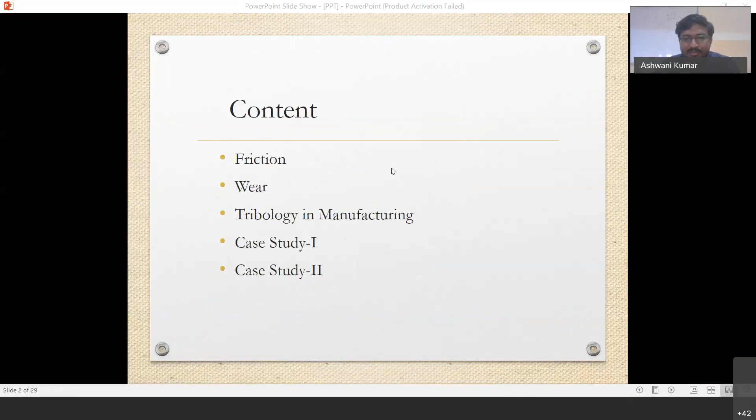In this session we will start with what is friction, what is wear, and then the application of tribology in manufacturing. We will start with friction, wear, and tribology in manufacturing, and there are two case studies that we will discuss.

So basically, what is friction? All of you know what friction is. Friction is just a resistance to movement of one body over another body. This is the basic concept. I will go through in detail the concept of friction. So friction is just a resistance of movement of one body over the other body.

But friction may be between a solid and gas, that is aerodynamic friction, or between a liquid and a solid, that is liquid friction, and there is internal friction also, due to internal energy dissipation. There is no single particular reason we can point to for the existence of friction - there are a number of mechanisms and reasons that friction can happen.

So friction is used to describe a gradual loss of energy in many situations. For example, internal friction dampens the vibration of a solid, viscous friction slows the internal motion of liquid, and there is skin friction, between a moving airplane and the surrounding air. In this lecture we'll deal with solid friction, that is between two solid bodies - the relative motion between two solid bodies.

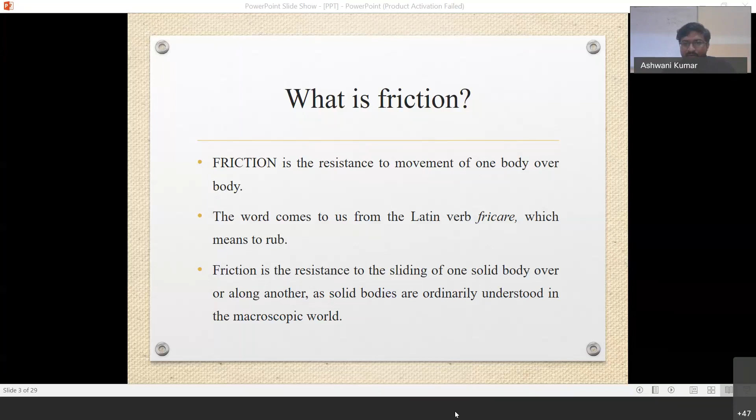The first earlier invention of man is the finding of cooking fire around 5 lakh BC, using the application of friction. The second earlier invention is around 3500 BC, the finding of the wheel, where we see that rolling friction is less compared to sliding friction. And then around 1880 BC we found evidence of the use of lubricant, that lubricant can be used for the purpose of reducing friction. So this is the history - we have very early histories regarding friction.

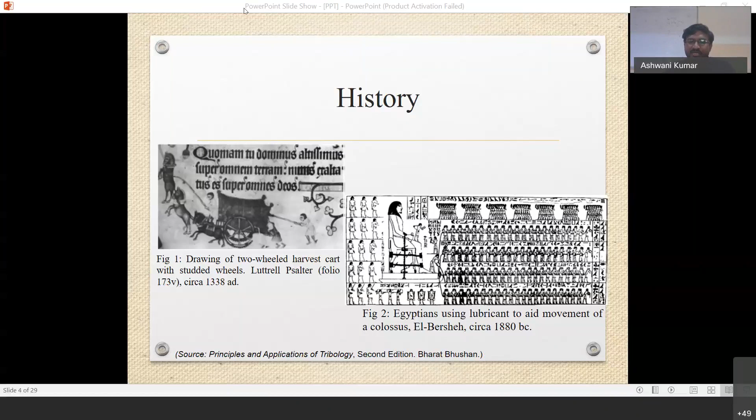In 1880 BC, there's an attempt to reduce friction, shown in a temple painting where they used animal fat for the reduction of friction. Then in 1495, there's history about Leonardo da Vinci, who formulated two basic formulas for friction: friction is independent of contact area, and friction is proportional to the load. So these are the histories.

After 200 years later, Guillaume Amontons rediscovered this concept and reasoned that friction was primarily a result of the work done to lift one surface over the roughness of the other surface. So the concept is the same throughout, but with evolution, we are increasing the points or understanding different causes of friction.

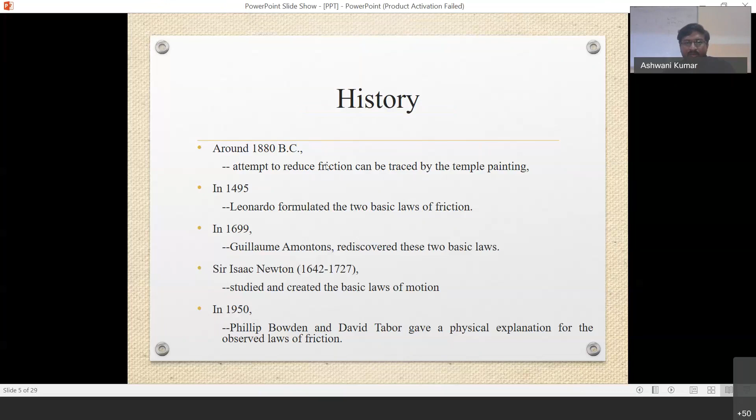Now we can discuss the general causes of friction. In general, a smooth surface produces less friction than a rough surface. What is the cause of that? The cause is how hard the surfaces are pushed together, or the type of surface involved.

This means friction is caused by the forces between the two contacting bodies acting on their surfaces. The forces are determined by, besides the load, the properties of the contacting materials and the area of contact. These are the points we have to consider: contacting material and area of contact.

Friction forces are usually not directly predictable. For example, because of changes in the environment, the surface of the bulk material changes due to environmental reactions, forming an oxide layer. So we can't say we can predict friction perfectly. The real contact is entirely different from the bulk properties of the material, so the causes of friction are non-predictable.

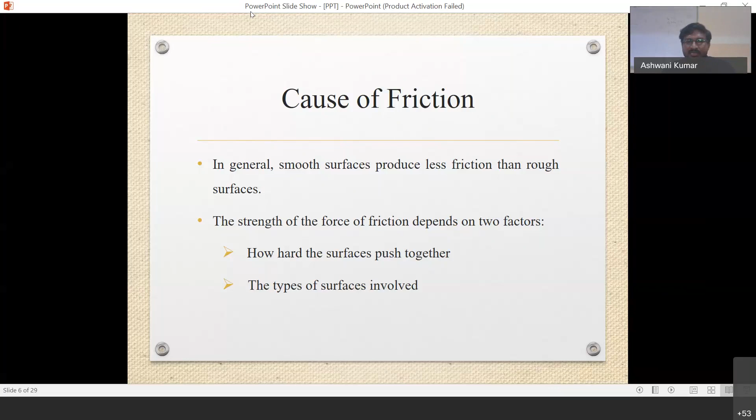There are different laws given for dry friction by different researchers, and this is a summary of those laws. The first law tells that in many situations where the resultant tangential force is smaller than some force parameter specific to the situation, the friction force will be equal and opposite to the resultant applied force, and no tangential motion will occur.

These are the six laws proposed by different researchers, concluded by Moore and Rabinowicz. The second law: when tangential motion occurs, friction always acts opposite to the direction of relative velocity of the surfaces. The third law: friction force is proportional to the normal load. The fourth law: coefficient of friction is independent of apparent contact area. The fifth law: the static coefficient is greater than the kinetic coefficient.

The coefficient of friction is independent of sliding speed. This is the sixth law.

But none of these six laws can be said to be applicable in every case. None of these laws is entirely accurate. For the purpose of dry or solid friction, laws 3, 4, 5, and 6 are only applicable under certain conditions; under different conditions they are entirely not applicable.

For example, the third law is valid only when the normal load is assumed to be very low compared to what is causing the contact area.

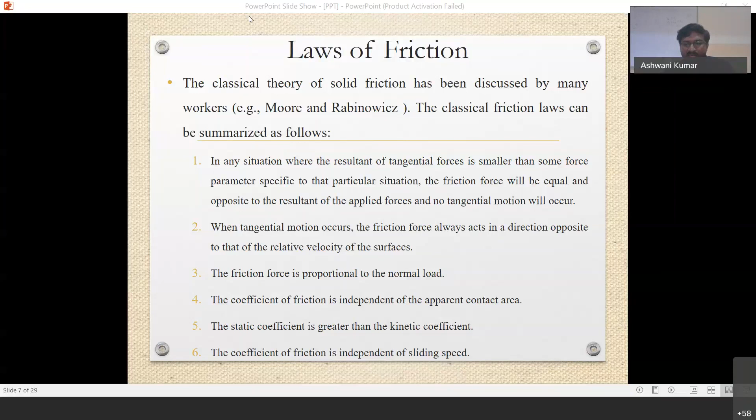When the normal load is very low, the third law is very applicable. In case of the fourth law, the materials in the contact area are assumed to have definite yield points, such as metals. In that case, it does not apply to elastic or viscoelastic materials. So these are the different conditions we have to understand, where we can apply this law and where we can't, because we are not able to apply the entire law at a point.

There is a quote by Tabor, quoting W. Pauli, that God made solids and the surfaces are made by the devil. Why so? Because the surfaces are extremely complicated due to their topography and chemical reactivity. We can say that their composition and microstructure may be very different from those of the bulk solid, and may be very difficult to determine or predict accurately. This is the challenge when dealing with friction.

You are able to see the geometric shape of a surface, where there are a number of micro events. Because of these micro events, there are different types of roughnesses. We need to understand what is the macro deviation from the ideal surface, what is the roughness, and what is the micro roughness. So this is very complicated.

Even after surface polishing, we have roughnesses, micro roughnesses, or macro deviations also. This is a part of the research we have to deal with. The difficulty is not the polishing itself, but how we are going to measure this one. As part of research, we can find methods to measure these roughnesses.

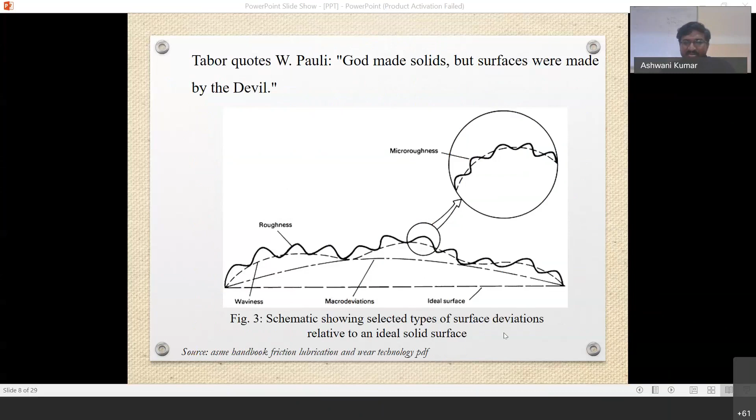So basically my point is to make you understand what is the basics of friction, what is the basic mechanism, what we are dealing with the surfaces, what we are dealing with micro roughness, and what are the different laws. This is the aim to make you understand the basics of friction. I am not going into finding the equations and mathematical expressions regarding friction. There are deep mathematical expressions for that, like different types of sliding friction, and we can go for rolling friction also. So this is just an explanation about the basics of friction, and what research related you can find or do in this area.

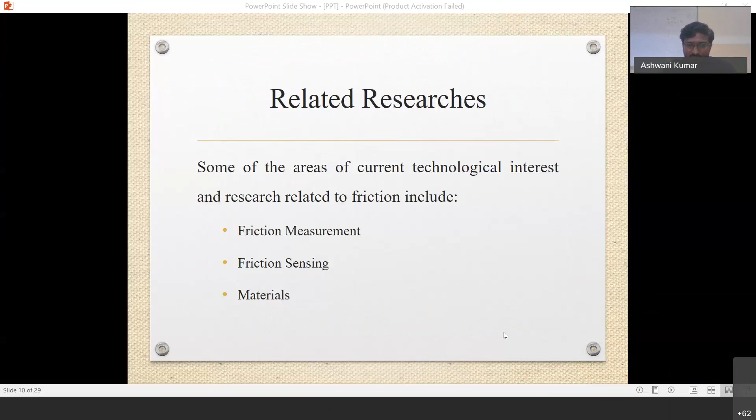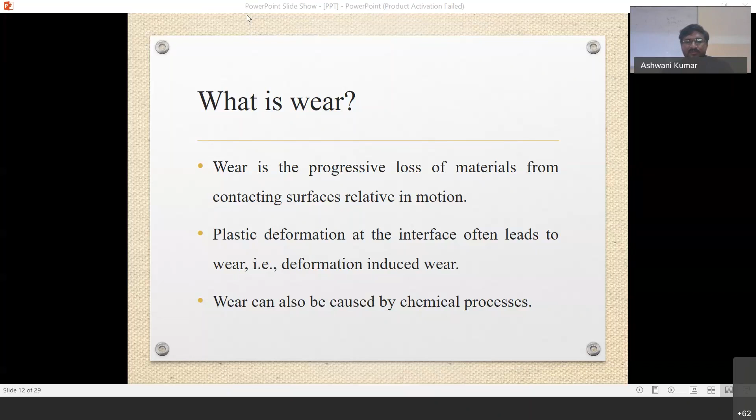This is just the basic classification under which we can define wear. Basically, there are various forms of wear in industry, or in our day to day life, such as lubricated wear or unlubricated wear. There are two conditions, and there are other things like severe wear we can classify, or we can also classify mild wear and sliding wear. These are the different types of classification we can consider for wear. Because of this classification, we can't say that in lubricated or unlubricated wear, only one mechanism like adhesion or abrasion is responsible. No, we can't say that. So there are a number of individual mechanisms, or combinations of wear mechanisms like abrasion, adhesion, fatigue, and oxidation wear, responsible for wear.

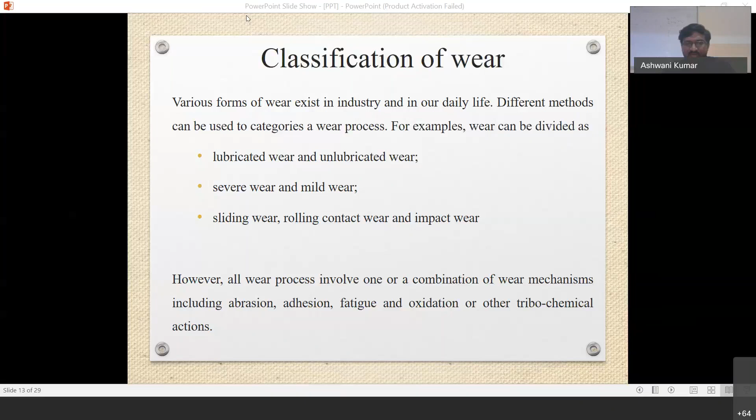So in lubricated conditions, there are different types of wear. Also in lubricated conditions, the wear may happen because of abrasion, or because of adhesion also. And in the case of unlubricated, this may also happen because of a combination of both. So basically, there are different ways wear can be understood, and we will see the applications of wear. So wear can also be classified as wear dominated by the mechanical behavior of the material, or wear dominated by the chemical behavior of the material, we can say.

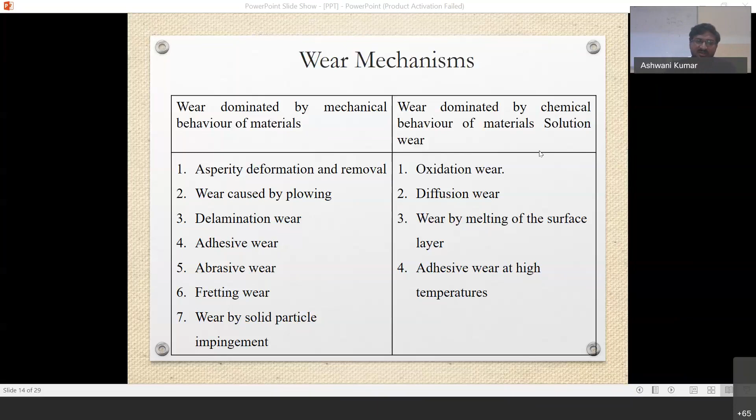Under material behavior, we can say there are asperities deformation and removal, and wear caused by plowing, delamination wear, and adhesive wear. These are the different classifications under material behavior. Or we can say wear dominated by chemical behavior of material, like oxidation wear, diffusion wear, by melting of the surfaces. So we are going to discuss the different types of wear, but in detail we will discuss only the severe wear we are concerned with, like abrasive wear, which we will understand first, because these are responsible for severe wear.

So we will discuss what is abrasive wear. Abrasion is the most frequently encountered wear mechanism in industry. There may be two types. The first one is three body wear abrasion. This involves a harder material that is either trapped between two sliding surfaces, abrading one or both surfaces. So this is abrasion wear by three body wear abrasion.

The example of three body abrasion is readily found in the mining industry and different machinery working in the desert, where contamination of dust particles with the equipment may cause this third body abrasion wear. And the second type of abrasion wear is two body abrasion, which occurs in metal on metal contact when the asperities on the harder metal plow or cut down the other surface. So this is what we call two body wear, and the wear particles formed like chips, as we found in lathe machining operation. So the type of cutting wear particles, we can characterize the type of wear also by the particle type.

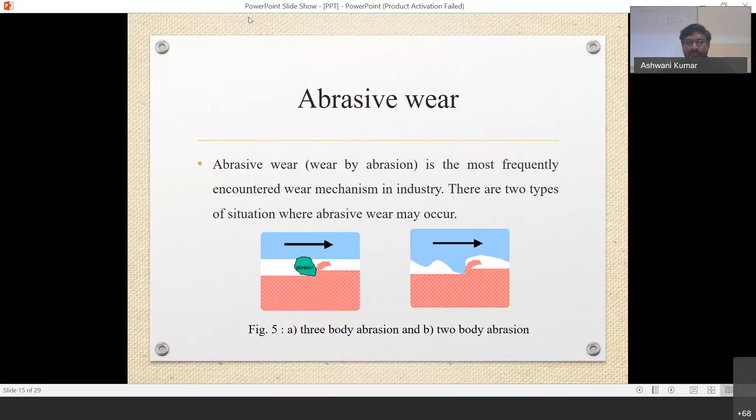We can analyze this with this picture, the mechanism of material removal in abrasive wear. The material in the softer surface is removed by the combined effect of micro plowing and micro cutting, or micro cracking. As a result, the worn surface is generally characterized by grooves and scratches, as you can see in the figure.

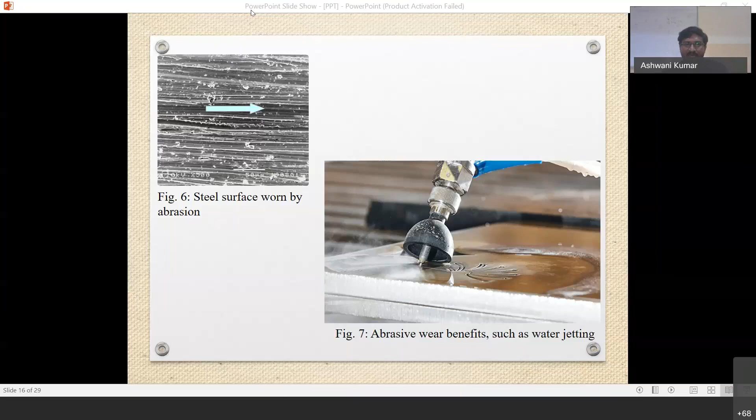Next we'll understand the different things in adhesive wear. We can't say that abrasion wear is the only type that exists. We have adhesive wear that will produce severe wear. Engineering surfaces are never perfectly perfect, as we discussed, so even highly polished engineering surfaces have irregularities and asperities in contact.

As a result, when two surfaces are in contact or sliding over each other, there is plastic deformation and intermetallic adhesion will also occur, forming a cold weld junction between the contacting asperities sometimes. The strength of the junction is determined by the crystal structure and the mutual solubility of the two contacting bodies.

The tendency of adhesion is lowest for a pair of materials with almost zero mutual solubility, but this is limited to very few metals. So there is a tendency that when two bodies slide over each other, there is a tendency of adhesion. Most metallic materials show an appreciable tendency toward adhesion.

So when the two contact surfaces undergo relative motion, tearing must take place, either at the cold weld junction or inside the original material, depending on which one is weaker.

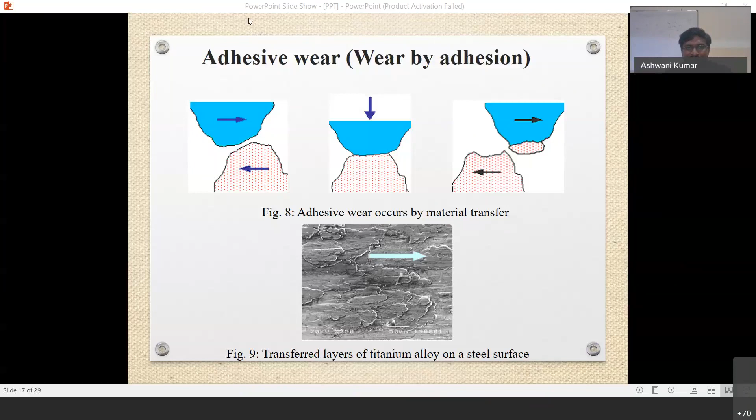So next we are dealing with oxidation wear, which is also a reason for severe wear. Metal surfaces are generally covered by a layer of oxides, which could prevent metal to metal contact, thus avoiding the formation of adhesion and reducing the tendency of adhesive wear.

Oxide is a favorable factor in reducing wear of metallic materials, but whether such beneficial effect can be realized strongly depends on the material property. When the hardness of the material underlying an oxide layer is low and the contact load is relatively high, the metal beneath the oxide layer gets plastically deformed, and the asperities in the hard surface will penetrate through a thin oxide layer, leading to normal metal to metal contact. In such case, wear by adhesion or abrasion will occur depending on the mechanical and chemical properties of the contacting metal. So the beneficial effect of the oxide is minimal, and wear rate is generally high.

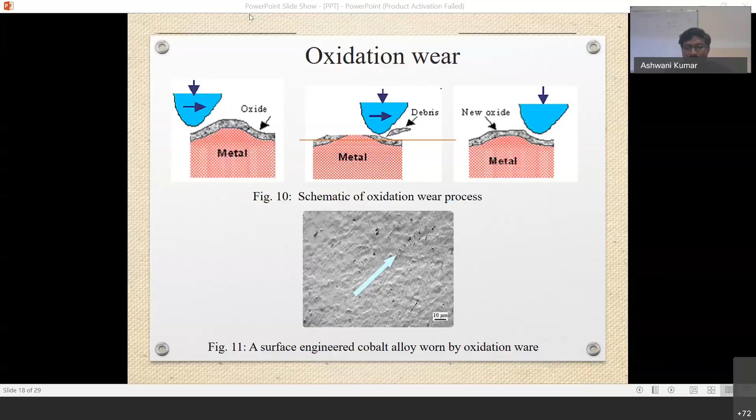Now we will see what is tribology in manufacturing. First we'll understand the basic thing, what is tribology.

Tribology was first reported in a landmark report by Jost in 1966, and the word is derived from the Greek word tribos, which means rubbing. This is the very basic meaning of the word tribology - the science of rubbing. Basically tribology includes wear, friction, and lubrication. So all the aspects we have discussed - friction and wear - and we didn't discuss lubrication. We are applying or using lubrication to reduce friction and wear everywhere. So tribology just includes the keywords friction, wear, and lubrication.

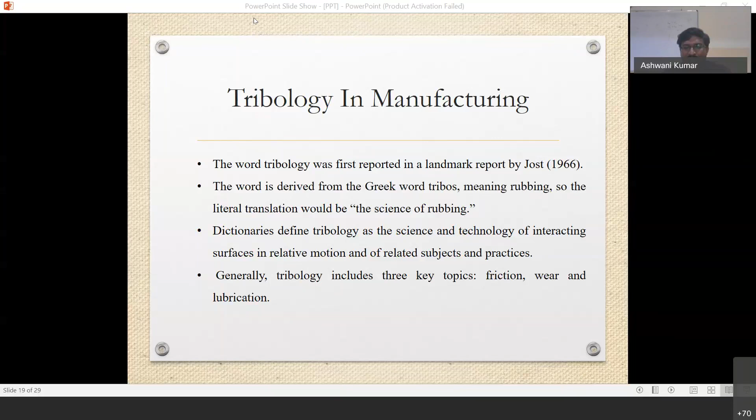The definition from the dictionary says tribology is the science and technology of interacting surfaces in relative motion, and the related subjects and practices. So tribology deals with friction, wear, and lubrication. This is used in different applications in manufacturing aspects where tribology deals, wherever friction exists. So we can say wherever there is existence of friction, there is existence of tribology.

Tribology is the art of applying operational analysis to a problem of great economic significance, namely the reliability, maintenance, and wear of technical equipment, ranging from spacecraft to household appliances.

The surface interactions in a tribological interface are highly complex, and understanding them requires knowledge of various disciplines: physics, chemistry, applied mathematics, solid mechanics, fluid mechanics, thermodynamics, heat transfer, material science, rheology, lubrication, and machine design. Tribology is a very interdisciplinary branch, requiring all these fields of knowledge to understand the highly interactive surfaces when two bodies are in relative motion, causing wear and friction. We have to understand different types of wear and friction, and to understand these things we need knowledge of different disciplines.

These are the aspects of manufacturing in tribology. Tribology exists in metal cutting, grinding, rolling, extrusion and drawing, open die forging, and impression die forging. You can refer to sources for details on the different ways friction applies and how we reduce friction through proper optimal lubrication.

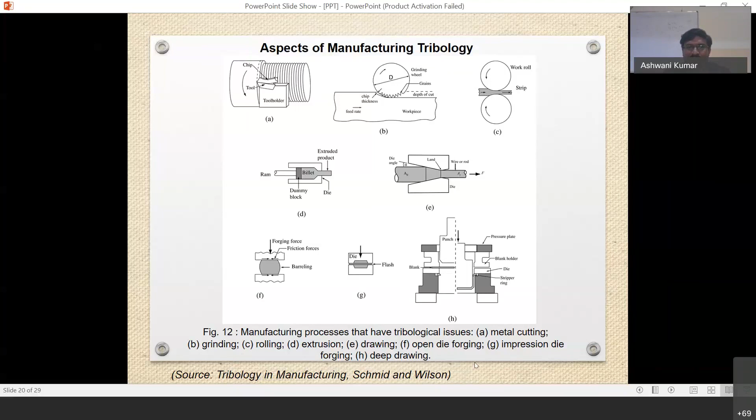Now we will see one of the case studies we will discuss. In this case study we have analyzed the performance of abrasive water jet machining process, which is mainly dependent on the jet diameter, which is prone to change over time due to nozzle wear.

We are seeing different pictures. There are four different nozzles for water jet machining, taken at different stages. In this figure, the nozzle wear has been analyzed in this study.

The nozzle wear has been analyzed using the vibration aspect. We see the setup, how it is applied. We are measuring the vibration spectrum, and the experiments are conducted with four different types of nozzles, recording the different vibration spectra to understand the effect of the wear.

Here we have analyzed the different types of vibration under the different nozzles. The difference in the nozzles is that we collected different stages of the nozzle, at different nozzle diameters, since the diameter changes over time as it wears out. So what are the differences we have analyzed?

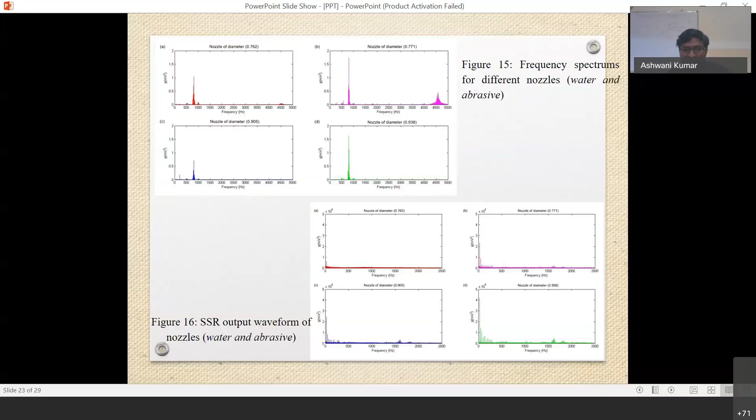So this is the first aspect. Next, to understand the application of wear in manufacturing, we can analyze wear of the tool by using lubricants while machining in different processes. We use fluids, and in the fluids we can collect particles.

From the particles we can analyze what type of wear is going on. So after collecting the particles from the lubricants, or the coolant that you are using, we have to separate the small wear particles generated during the machining process.

For that purpose, we can apply a ferrogram maker that can be utilized for separating the particles from the lubricant used during machining. In this method, we take samples and apply this technique.

Here you see a ferrogram maker, and with the ferrogram maker we are making slides. In the ferrogram maker, we take the lubricant that has the wear particles and pour it into a thistle tube by mixing.

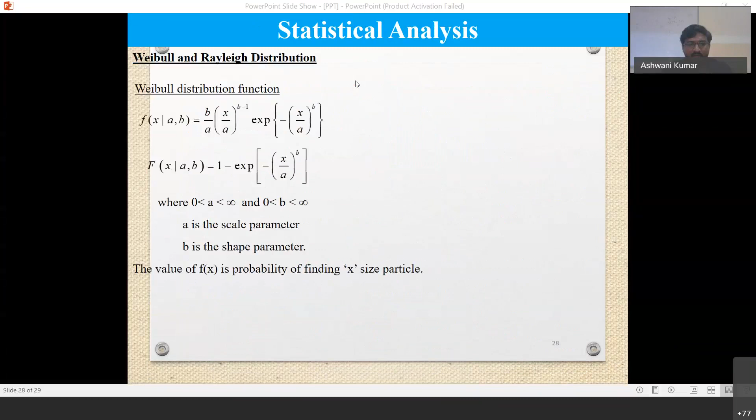Yeah Ashwani, is the 25th slide the last slide, or is this the conclusion slide? Okay sir, okay sir, we'll get stuck maybe. Okay, no, you can tell about the paper we recently got. No?

These two are the recent work also, this one the recent work. Okay, no, I got this paper, you can show them actually. You have that paper soft copy? Maybe sir, I have this one, that one actually. Okay sir.

You can switch off your video. Okay sir, so there is some disturbance in the voice. Okay, so let's...

In fact, we got a paper recently on wear analysis of abrasive water jet nozzle using SSR technique, recently published in IMechE, Part E, which is the mechanical engineering process part. This work was done about 7 years back, around 2012-13, when Ashwani was doing MTech with me. We thought we should write a paper, but after that he joined PhD, and I was busy elsewhere, also completing my own PhD at that time. So we couldn't write the paper then, but recently we have written it and it got accepted.

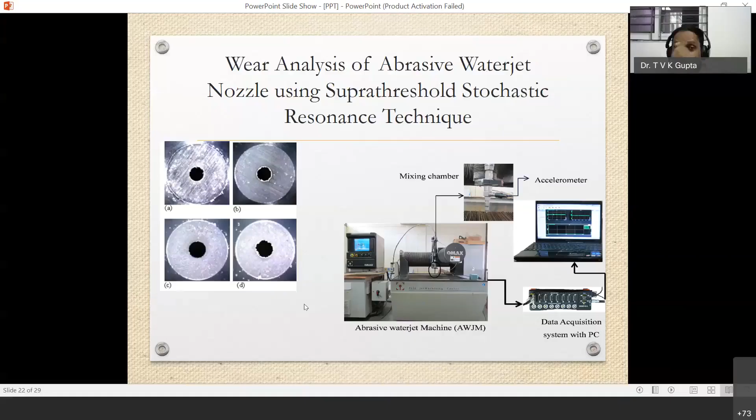Is it visible? This is your screen visible. Case study 2, next slide. This one, here we got stuck actually. After that nothing is visible. This is the last slide. Even if you're talking, okay sir, you can show.

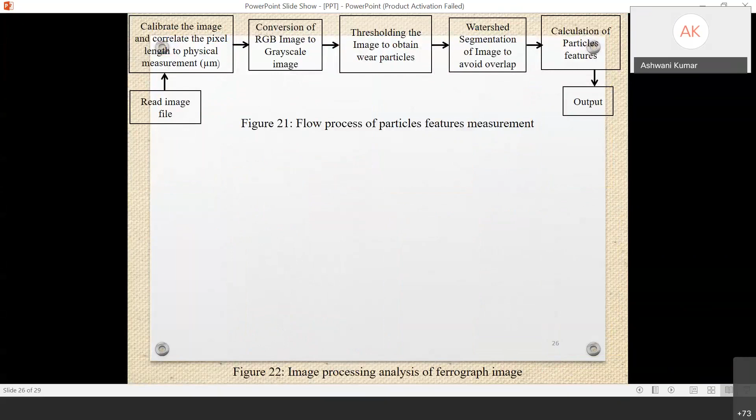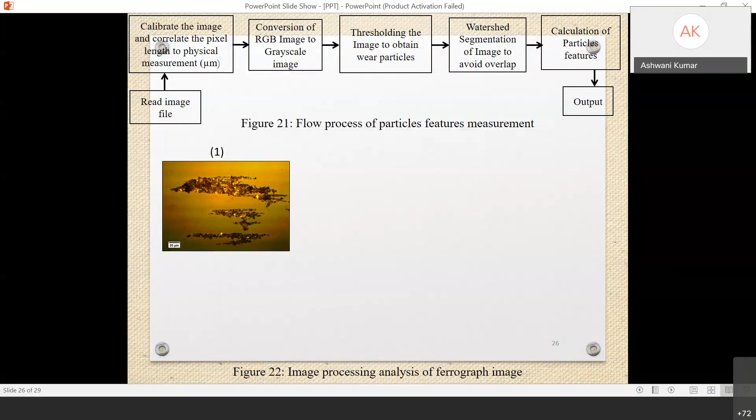This is the thing I am discussing, about after the separation or after getting the photographic view of the wear particles, we can do image processing methods for getting different wear particle characteristics. We can obtain characteristics like the area of the particle, the size of the particle, or we can measure different parameters of the particles. This is the way in which we can analyze the particle or do the image processing.

This is a very basic thing for starting. The first stage is to read the file, and the second step is to calibrate the image, correlating it with the physical length, and then convert the RGB image to grayscale. Then this is thresholding. This is done in MATLAB, yes sir.

What is the particle size? We are just showing the mean particle size here — mean major length, mean minor length — that is 17.9 micrometers. Very small actually, okay.

We can apply this method to tool monitoring also, when we are using high lubrication. Yes, that is what we are right now doing with MQL, when we are characterizing the particles we are doing this method only, but not through MATLAB — we have done it through ImageJ. ImageJ is one method, and there is other software, like Pebble software, that can also do this. ImageJ is more convenient than that, easier to operate for characterizing the particle.

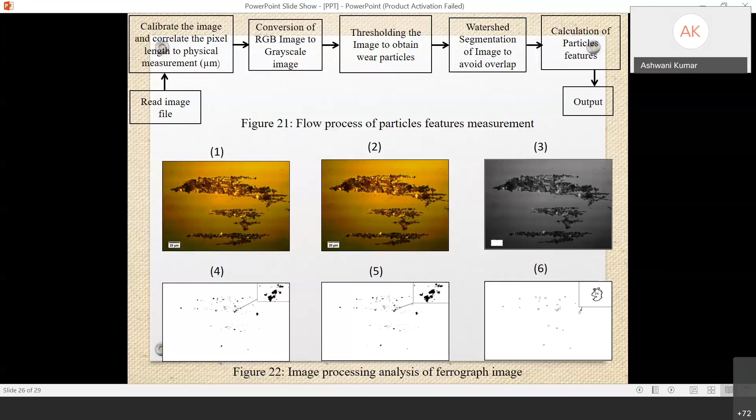Next slide, this is the deviation. In this way, we are able to calculate different features of the particle — major length, minor length, area, perimeter. We can also calculate the mean of the particle and standard deviation. In this way we can plot and analyze different distributions using statistical analysis methods. We discussed Weibull distribution and Rayleigh distribution to get the probability distribution of wear particle size, to calculate the probability of finding a particle of a certain size, or to make a model with the help of statistical analysis. In this study, you can find that the majority of particles lie between 10 micron to 20 micron.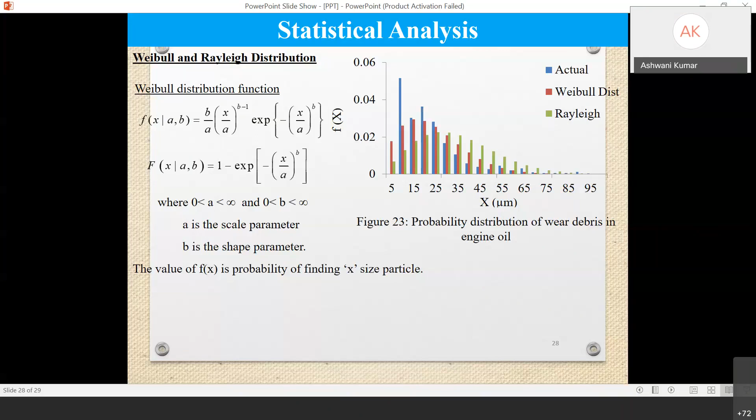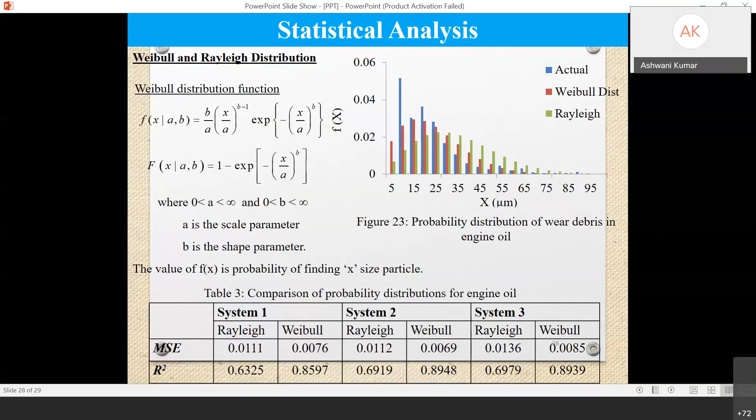So in this way, you can also make for your system what is the severity and how much you can go with that particle size - what is the larger particle size limit in your system you can analyze, after which the machining operation gets deteriorated. In this way, you are able to predict the probability distribution of wear particle size, and you can also have the mean square error by comparison, and generate the R square. Okay, so this is the thing we are discussing.

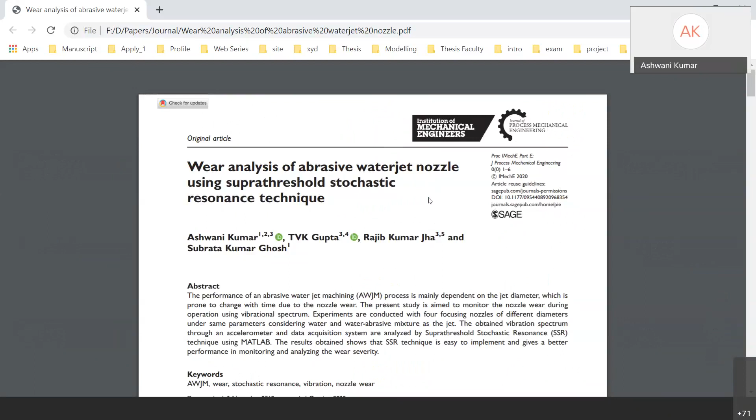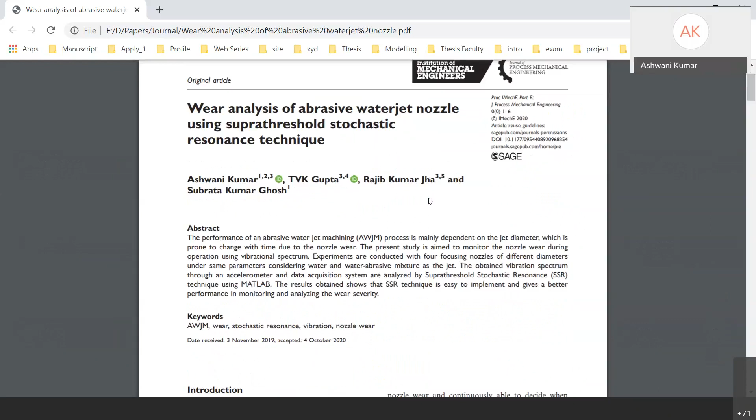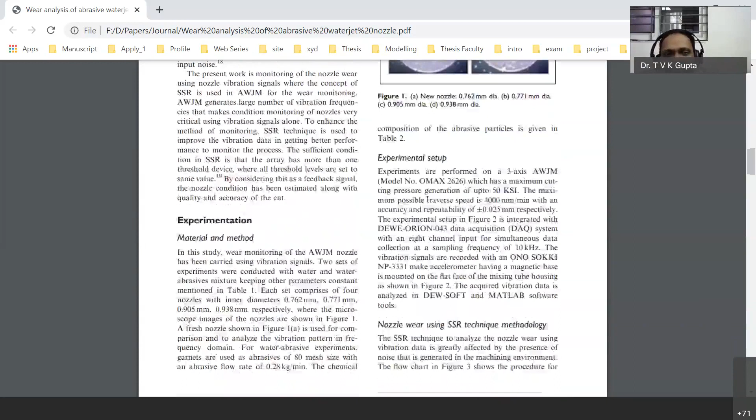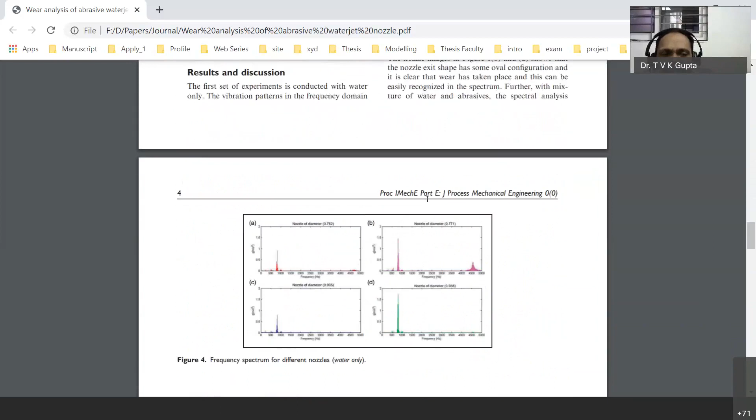Wear analysis of abrasive water jet nozzle using suprathreshold stochastic resonance. In this method, the suprathreshold stochastic resonance is applied for the purpose of signal processing - we are processing the vibration spectrum using this method. This work is a very novel work. The quantum is very less, but it's a novel work. It's only 6 to 7 pages, the paper we talked about, and we got it published. So in research also the same thing happens - not necessarily you are going to do a large amount of work. Though you do a small amount of work, if it is novel, definitely you will get the publication.

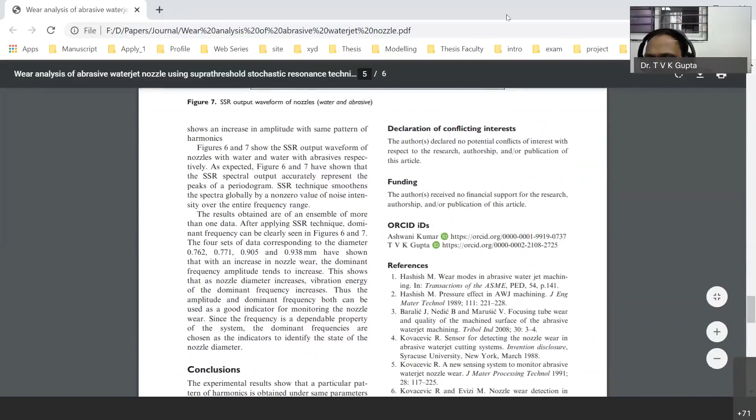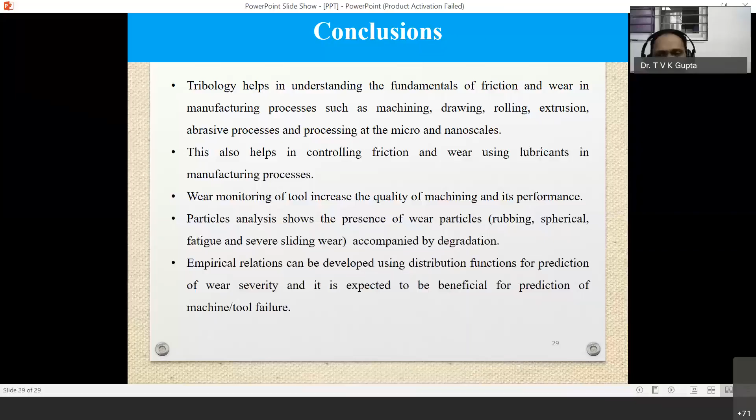Somebody is asking regarding kindly share details regarding the analysis of types of wear. Types of wear, Palaksha, yeah. Palaksha Reddy, are you talking about the wear debris related, or what type of wear? This is the type of wear he is referring to - what is the rubbing wear type, severe wear type, using ferrogram. So actually, what is the question? Basically, kindly share the PPT and kindly share the details regarding the analysis of the type of wear. Okay, we are just analyzing on the visual.

Here I am just showing the visual aspects of analyzing - if the size of the particle is less than 5 micrometers, this is considered rubbing wear. Depending upon the boundary structure and the surface structure of the particle, we classify it as severe wear, spalling wear, or fatigue wear, based on the redundancy in the boundary. After matching, with basic training, you are able to analyze the difference between the fatigue wear particle and the spalling wear particle. There is also a catalog you can match your particle picture against, and then analyze what type it is. The basic feature is that we have to analyze the boundary features - what type of boundary, smooth boundary or which type, and what is the scratch on the surface of the particle. On that basis, we analyze the particle feature, characterizing the particles.